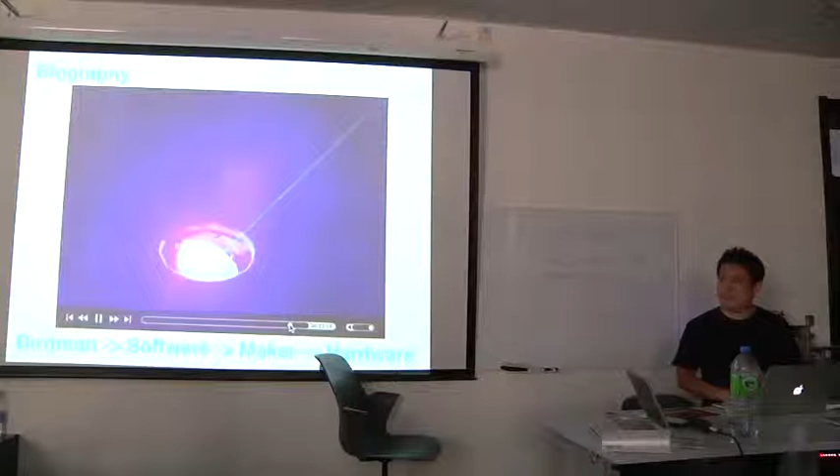It's really romantic. But I'm still a hardware user, an Arduino user. I think that's not the perfect maker, making something.

So after that, I started to make my own PCBs. For example, this is a Japanese old rice measure used just after World War II, and I added 2 Nixie tubes to make a kitchen timer, very simple. I used free software to design the schematics and just pushed the auto-route button, so it's really easy. It was my first time making my own PCBs, and I found it really interesting to make my own board, so I started selling my own hardware.

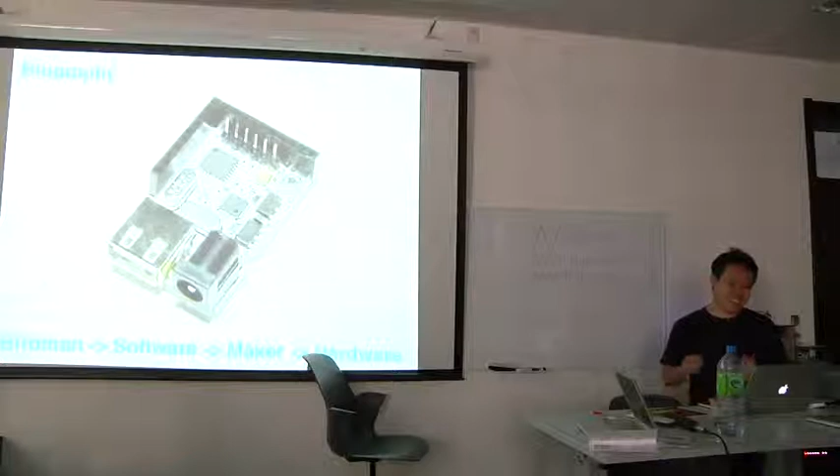This is Arduino itself, but it has a USB host IC also on the board. It can communicate with an Android phone, so even an Android programmer can easily open the door to make Arduino hacks. It's really easy.

I have some crazy movies a lot, but I have to finish the introduction first. Yes, I have my pick and place machine. This is my room, and I have my own pick and place machine. So I'm designing, manufacturing, and selling every hardware and software from my home.

This is my home. I met Dennis in Singapore because I went to Malaysia after selling my own PCR machines. After selling it to the National Science Center Kuala Lumpur, I sold 10 pieces of this. This is my PCR machine.

It means a DNA amplifier. So let me explain what PCR is. PCR is a polymerase chain reaction. I'm not so sure about all of it, but it's really, really simple, yet it's really important technology for every DNA experiment. It won the Nobel Prize in '93.

Let me explain the picture on the right side. Usually DNA is a twisted pair, two strings, and it will be easily separated when we heat it to 90 degrees. You add some enzymes into these small tubes like this, and it makes the opposite pair. We have to keep it at about 50 degrees or so, which is the best temperature for the enzymes.

After making the opposite one, the green line, we heat it up again and it separates. Now we have 4 strings - 1, 2, 3, 4 - and we keep it at 50 degrees again to make them opposites. Heating again, we have 8. After heating and cooling, we call that a cycle. After one cycle, it doubles the count of the DNA parts we want to experiment with.

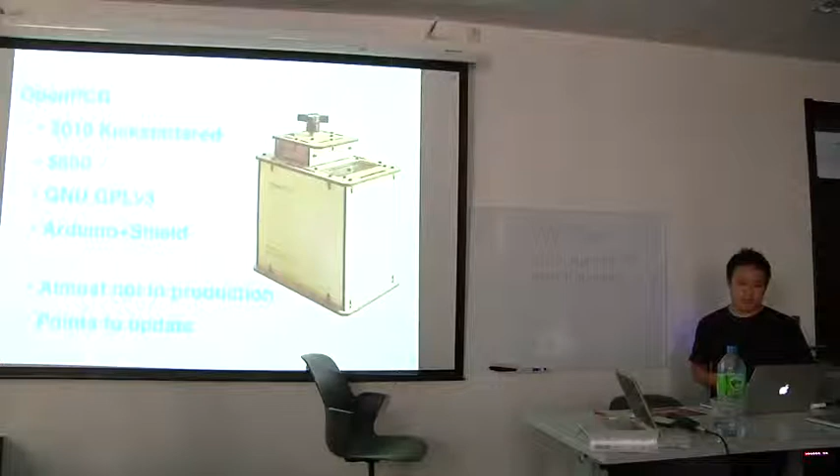I found some points to update to make it easier for many people to make. For example, so I changed it. It's really interesting to change something.

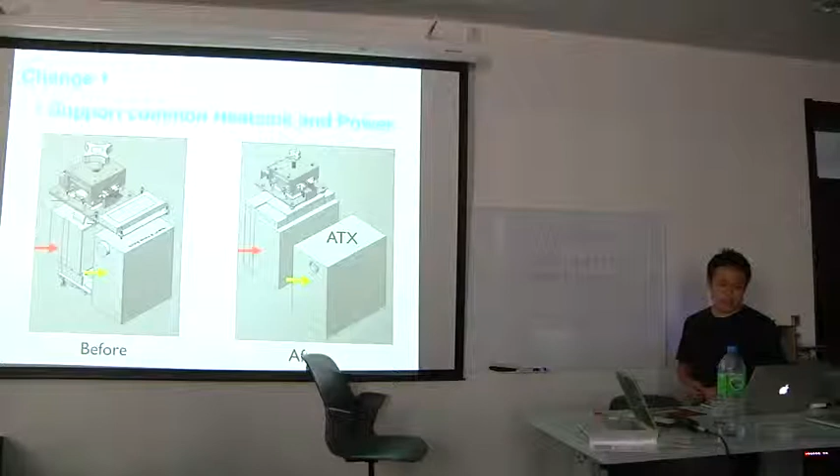For example, I changed it to be bigger first, to support usual heat sinks and power supplies. I can make it bigger so that I can use the usual ATX power supplies. So yes, it becomes bigger.

And I changed it - for example, maybe he is a rich man, and he made the metal part using drills. Look, the left one, yellow pointed, is very thick. It has to be made using drills and CNCs, and it takes hours, and it's very expensive.

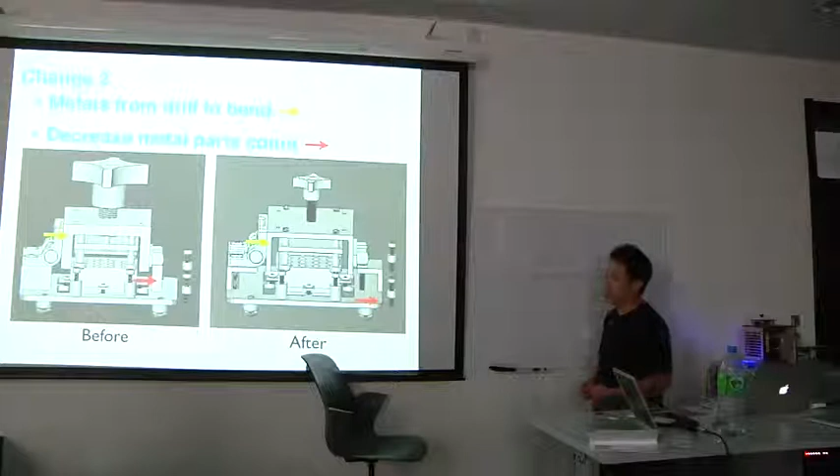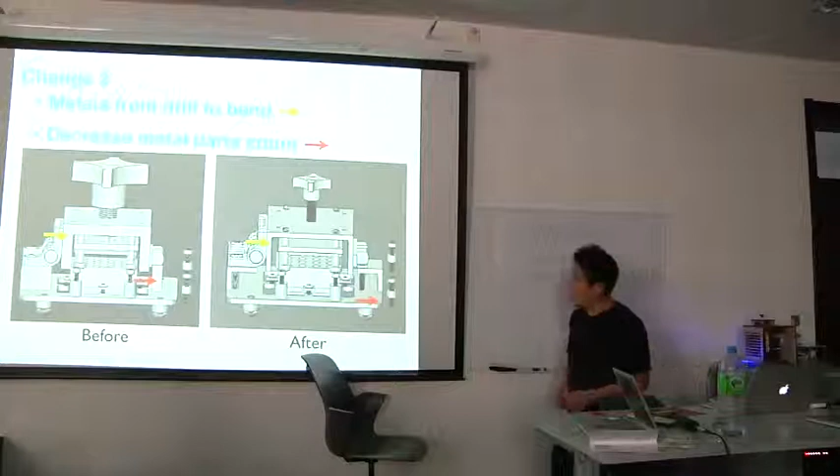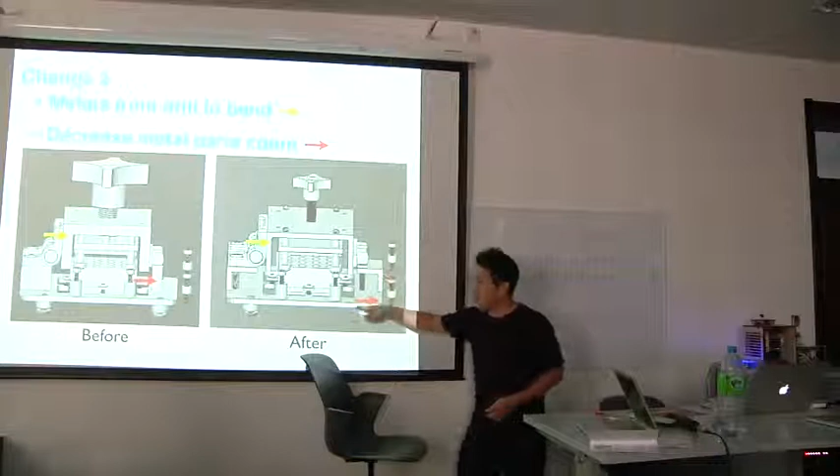But I changed it to thinner ones that can just be made by bending. It's very easy and cheap. The red line shows there are many parts of the block to support the upper parts, but I changed it to just bending like this. Then I decreased the parts count, so I can make almost all the parts for about $20 or $30.

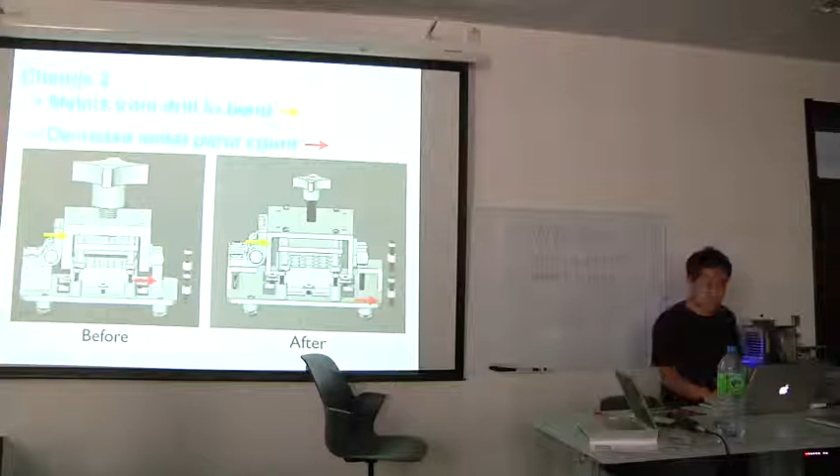After that it becomes thinner. And I changed its firmware - let me explain a little.

The original OpenPCR killed the Arduino firmware because they used the Adobe Air platform so it could communicate with USB mass storage. So they overwrote the Arduino firmware with USB mass storage firmware, so it cannot be reused as an Arduino after experiments.

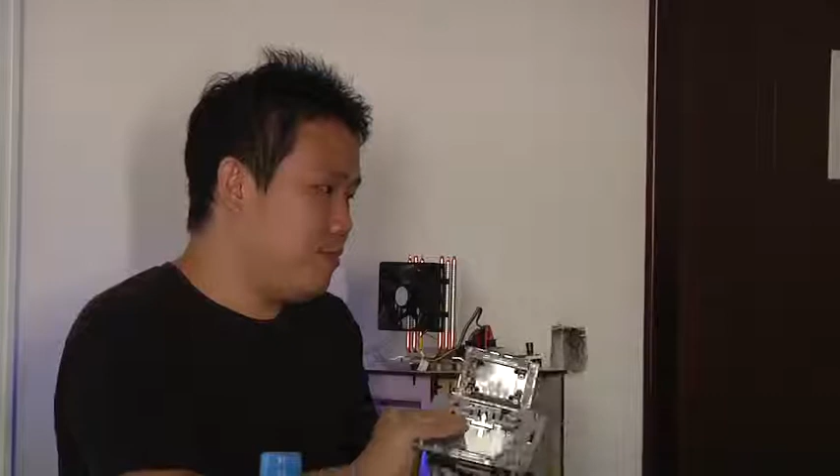Why don't the prices drop? Because $600 was the price a few years ago, and it's still that price. What do you think is the issue? What is the critical point?

The critical point, I think, is really only one or two things. There's a heater in the upper part that has to be made cheaper, and what we call the well, where we set the tubes inside, has to be made precisely and is really difficult. It can't just be made by bending.

It costs about $50 or so -- very expensive. What material is it made out of? The well part that holds the tubes is aluminum, but special aluminum that requires high temperature transfer, so we have to specify which aluminum to use.